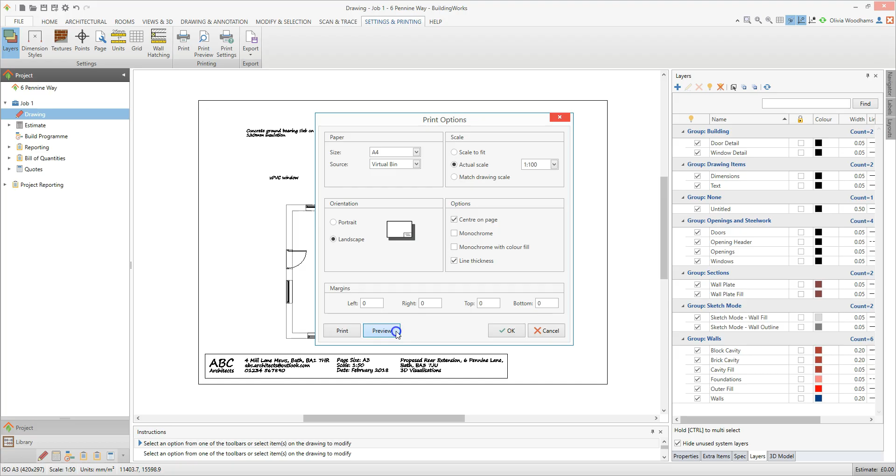Have a good look at the print preview. You can click the One Page button to view the whole page on screen. And you can zoom in and out of the page using the respective Zoom In and Zoom Out buttons on the toolbar.

Click Print to send the drawing to the printer, or click OK to return to the print settings.

If after you've set up the print options, the print preview shows the drawing to one side or even off the drawing page, there may be an erroneous item, which may not be visible on screen, somewhere on the drawing, which is affecting the position of the drawing on the printout.

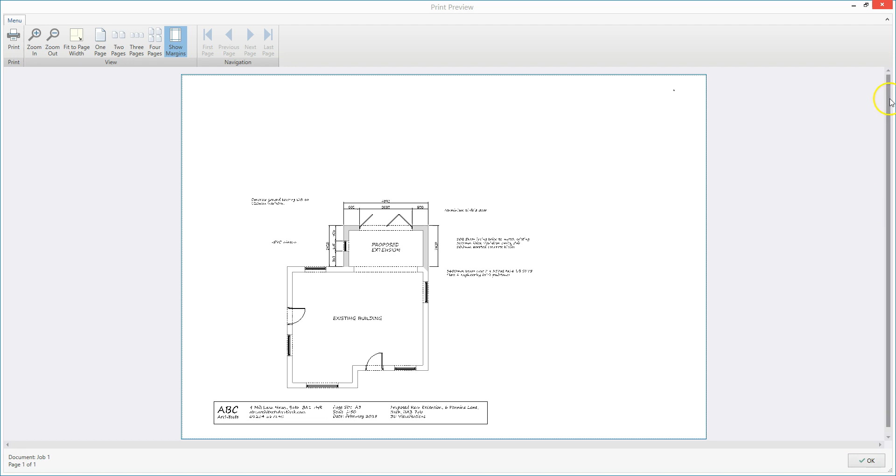Click OK to return to the drawing, close the print options, and then zoom out and drag your mouse to select any items which might be there.

If you find any erroneous items, delete them. Preview the document again and the drawing should appear correctly on the page.

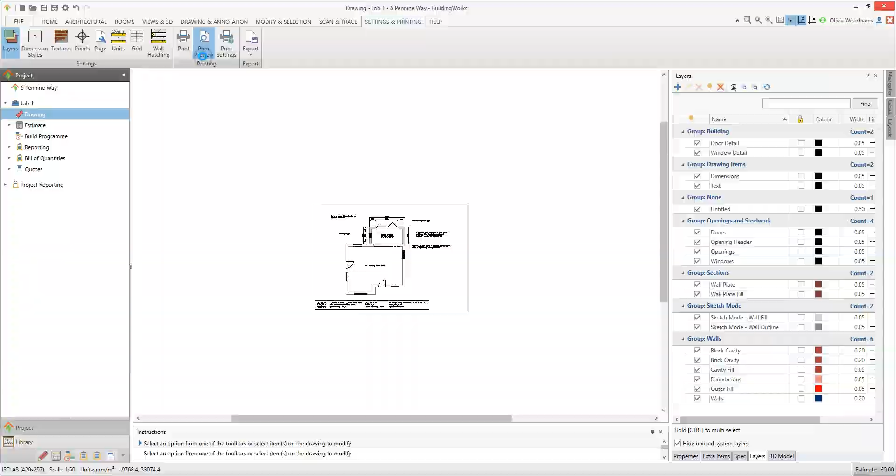If elements of the drawing, such as roofs or dimension lines, are not appearing in the print preview, you may have set some layers to not appear on printouts.

Return to the drawing page, go to the Layers window and scroll across to check the layers are set to be printed.

Tick the print tick box next to the layers which didn't appear in the print preview, then preview the document again and the missing elements should appear.

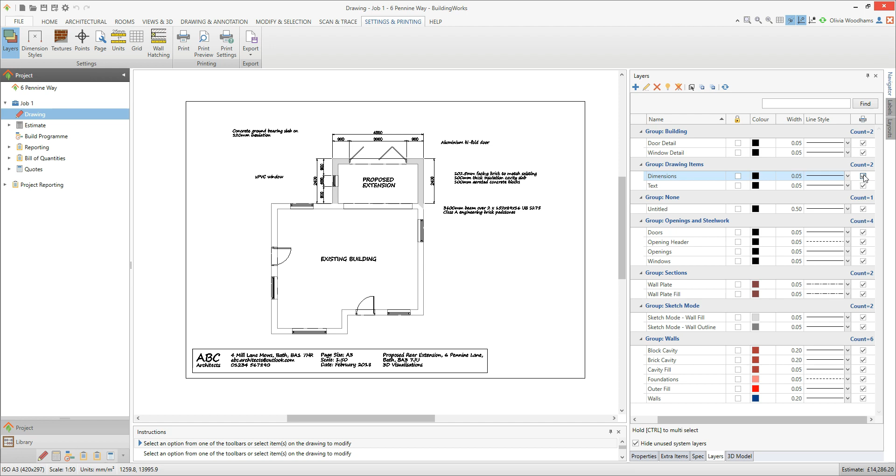Over to you. Hide or delete the construction lines using the buttons on the Drawing and Annotation tab. Then click the Print Settings button on the Settings and Printing tab to change the paper size, scale, orientation and other print options.

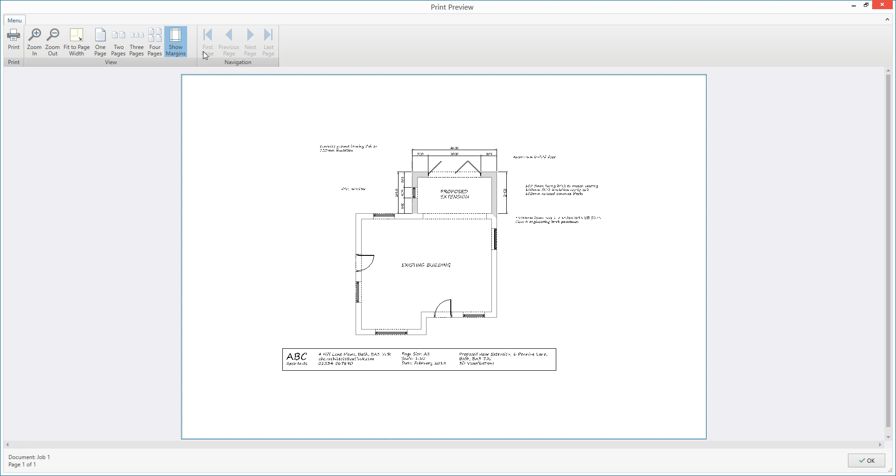Click Preview to preview your printout. Click Print if you're happy with the preview, or OK to return to your drawing.